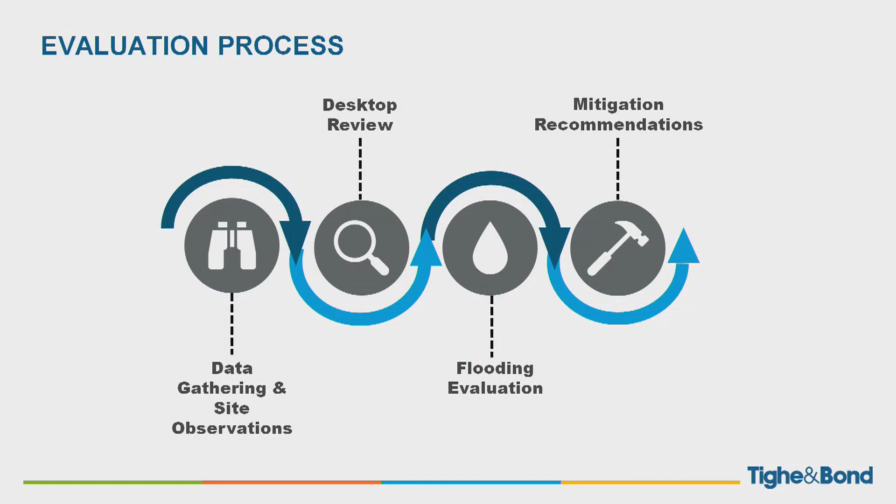So this map shows our study area, and if you're wondering what that shape is, it's based upon the area that contributes to the outlet of the entire drainage system, which is at the bottom of Seagate Road. That area is about 125 acres, shown in red. It consists of 239 structures and 7,400 feet plus or minus of mainline storm drainage pipe, so over a mile of storm drains in that area.

For reference, north is to the top. You can see Boston Post Road at the bottom there, and it extends as far north as Pleasant Street. You can see Gardner Street on the west or left side there. And at the lower right corner of the watershed, you'll see that's the Noroton Presbyterian Church, just for reference.

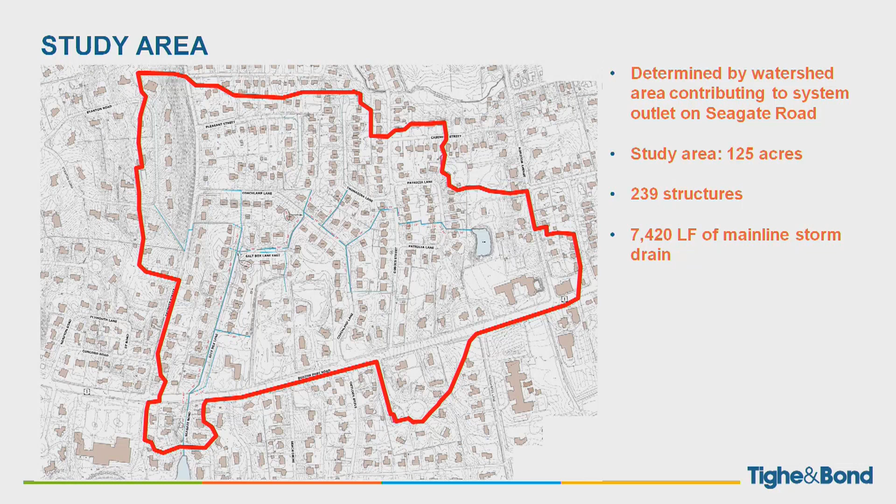So data gathering, it's like collecting puzzle pieces, right? There are different things that we look at. Some of them include the storm sewer maps. Also, we look at the flood insurance study maps that FEMA puts out, as well as high water marks. A lot of the neighbors had submitted to the town photographs that show flooding on certain dates, and that information is very useful for us when it comes to calibrating the model.

We also have rain gauge data. In order to correlate those high water marks to a rainfall event, we look at rainfall data to see how much rain had fallen on a particular date. We also look at the underlying soils, because if you can imagine, sandy soils drain much better than tight clay soils. So there are soil surveys that we use for that.

There's also flooding photos, as I previously discussed. Our field observations — just going out in the field, you can see sometimes high water marks on structures or walls or things like that. You could also see which catch basins appear to be undersized. We also look at tidal gauge data. A lot of times you don't need to look at this, but because this storm drainage system discharges to Holly Pond, we need to take a look at that. And then there's also the historic mapping, to see how the area has evolved and changed over time, and that sometimes lends clues as to what is causing some of the current drainage issues that you face.

So I'm going to start by discussing some of the flooding observations that have been made and how they relate to high water marks.

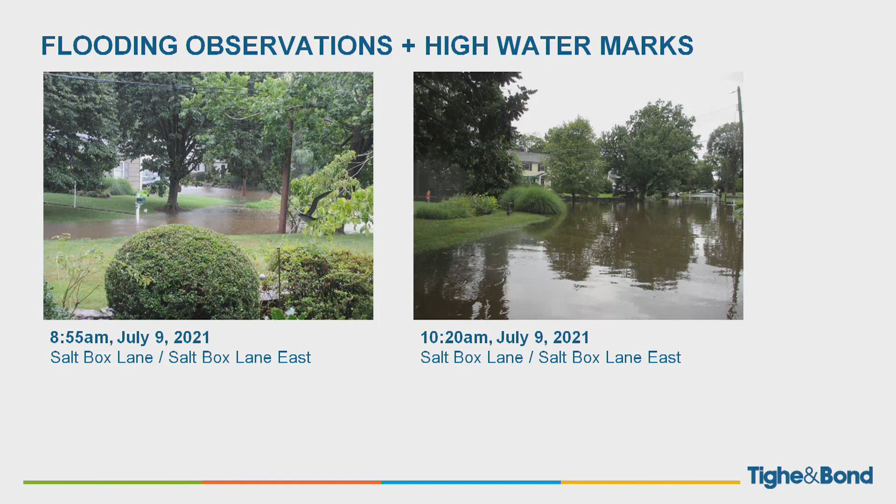Rain gauge data. There are various rain gauges around town, some part of a private weather network, and also here at Town Hall there's a gauge. We looked at the different gauges in the area and discarded the outliers. Sometimes a gauge is placed improperly or has a reading that doesn't make sense, so we apply a statistical analysis to discard the outlying data.

Then what we did was compare the measured precipitation and duration of the storm - how much rain fell and over how long a period - and compare it to NOAA Atlas 14, which is a guideline the National Weather Service puts out that ties specific rainfall duration with depth and a recurrence probability for areas throughout the country. We'll talk a little more about that.

So for a 24-hour duration storm in Darien, a 50-year storm will deliver 7.4 inches of rainfall. Keep in mind that's over 24 hours, and a 50-year storm doesn't mean you have the storm once and you're good for another 50 years. This is more of a probabilistic terminology that they apply.

For example, FEMA has been moving towards a percentage chance. A 50-year storm has a 2% chance of occurring in any given year. A 100-year storm is 8.32 inches of rain in a 24-hour period, so that has a 1% chance of occurring in any given year. For a 200-year storm, that's 9.4 inches in a 24-hour period, which has a 0.5% chance of occurring in any given year.

So our first significant storm event we'll discuss is related to Hurricane Elsa that happened in July 2021. You can see the different rainfall totals around the study area, and most of them were right around, on average, about 5 inches. There was one that was really low, and one that was significantly higher than the others, so we discarded those for the purposes of the analysis.

But that basically equated to a 50-year storm event because it dropped 5 inches of rainfall in a 6-hour period. If you look at the 50-year, for a 24-hour period, it's 7.4 inches. But by the time you translate that 24-hour to a 6-hour, it's a 50-year equivalent for that 5 inches of rain, which has a 2% annual chance of occurrence.

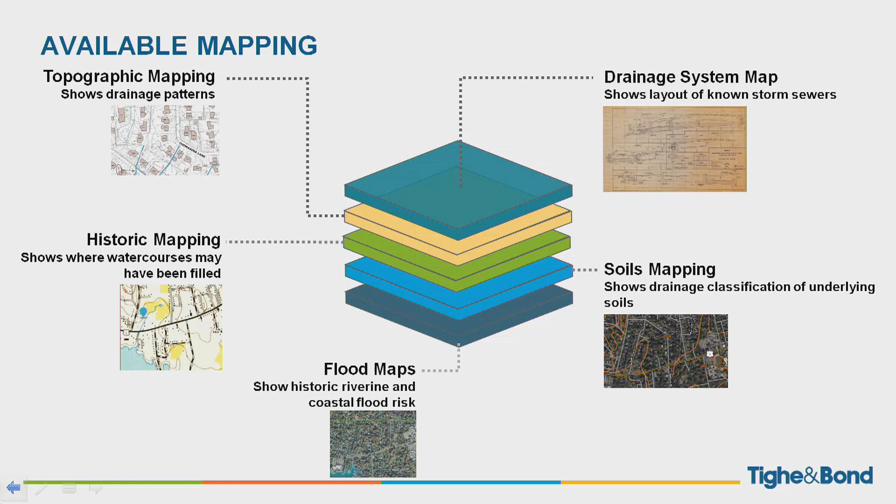One of the things that's important to realize about the flood insurance maps is that they represent historic risk. They don't represent current risk, and they don't take into account future risk. So that's something very important to keep in mind if you do look at these maps and interpret them.

The other thing is the flood insurance rate maps from FEMA only show flood hazards associated with coastal or riverine flooding sources, not necessarily urban or storm drainage flooding. So what this flood map shows is that there is a flood hazard associated with some of the area near Holly Pond, but in the study area there are no special flood hazard areas. Most of you know that that area floods, right? But it's not necessarily represented on the FIRM.

In fact, 30% of all flood insurance claims are filed in low-risk areas that aren't in a mapped flood zone. So just something to keep in mind.

We also look at topographic mapping prepared by the USGS, United States Geological Survey, and we look at the area over time, how it has changed. Believe it or not, they have maps going back to 1892 for the area. That marker shows the intersection of Saltbox Lane and Saltbox Lane East, and you can see the Post Road cutting left to right across the map. What's interesting is you can see a watercourse, that thin blue line, that snakes its way down into Holly Pond.

When you look at the map prepared in 1943, you can see that pond and the watercourse are still there, but you can see some development, more houses, more streets, so obviously some development happened. But then when you go to the 1951 map, the watercourse disappears. What we find a lot of times in doing these studies is that in areas where watercourses or wetlands have been filled, some of the drainage issues persist.

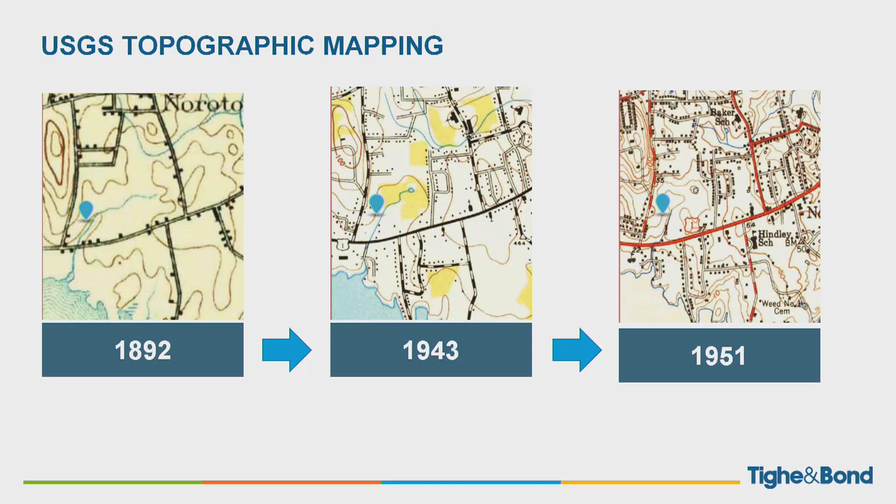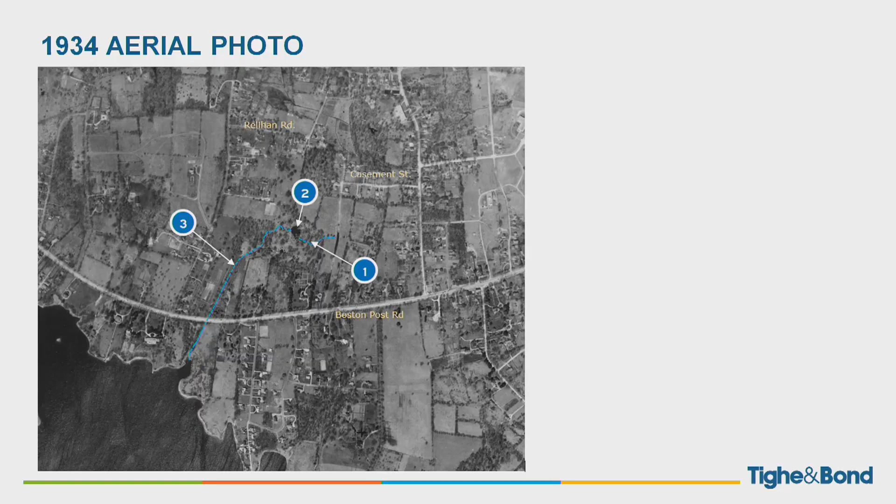Another resource we look at are aerial photos. This particular photo is from 1934, from the State of Connecticut Library. Some of the features I wanted to point out are the watercourse from Casement Street, labeled as 1. At number 2, you can see that small pond we saw on the USGS maps in the previous slide. The third one is that watercourse that goes down to Holly Pond.

You can see that in the dotted blue. It crosses the Post Road and then discharges to Holly Pond. Now, fast forward to 1965, you see quite a few things have changed. Obviously there's more development, and you no longer see that watercourse. All you see is a small remnant of a watercourse that runs behind the houses on Saltbox Lane and Saltbox Lane East.

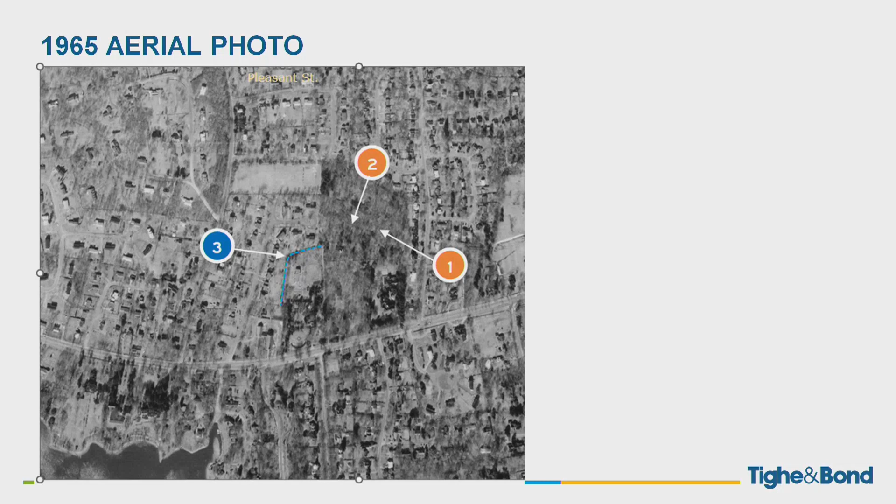So we supplement the mapping we get, the online resources, the photography, the USGS maps, with field observations. Now this is not to be confused with a detailed field survey, which would be the next step in the design. But this is just to confirm certain things for the concept study that we put together for our evaluation. It's also intended to fill in some of the data gaps we identified in our initial desktop review.

For example, structures that appear to be missing from the mapping, we send somebody out to take a look. Sometimes we'll open a few structures just to confirm connections and pipe sizes. Then in certain areas, we'll need to know the slope between two pipe segments, between two structures. We'll send somebody out to measure down to obtain the depth of the pipe. That way we can calculate what the slope between the two structures is.

So the existing town drainage system, don't worry, I'll go through this in more detail. But first, what you see just came up on the screen in green, those are 12-inch pipes. And typically in storm drainage design, you want your pipe diameters to increase as you work your way downstream. So keep that in mind as I go through this. In blue, we have 15-inch pipes, and then the next dark blue are 18-inch.

Then you got a little segment of 24 there. And then we have a segment of 30-inch pipes. And then we have some 36-inch pipes. And then we also have two sections of channel, right? We have a section of channel behind Saltbox Lane and Saltbox Lane East. And there's another section of channel that is on the west side of Seagate.

One thing I do want to mention is that we did not do a detailed study of the pipes in Post Road. Those are state maintained, whereas the pipes that you see here on the screen are town maintained. We did account for the flow coming from Post Road into the drainage system, but we didn't do a hydraulic analysis of the pipes themselves.

So one of the things that's pretty clear here is that you have some larger diameter pipes that go into small diameter pipes. So we'll actually go through these, and just looking at this, we did find some areas that we thought warranted further observation, or that we thought were of note.

So the first one occurs in the northwest area of our drainage system. What you see here on the right are the topographic lines, right? The closer they are, the steeper the topography. We're looking at Gardner Road, and at the top there is Pleasant Street. There is an enormous elevation difference between Stanton Road and Gardner Road.

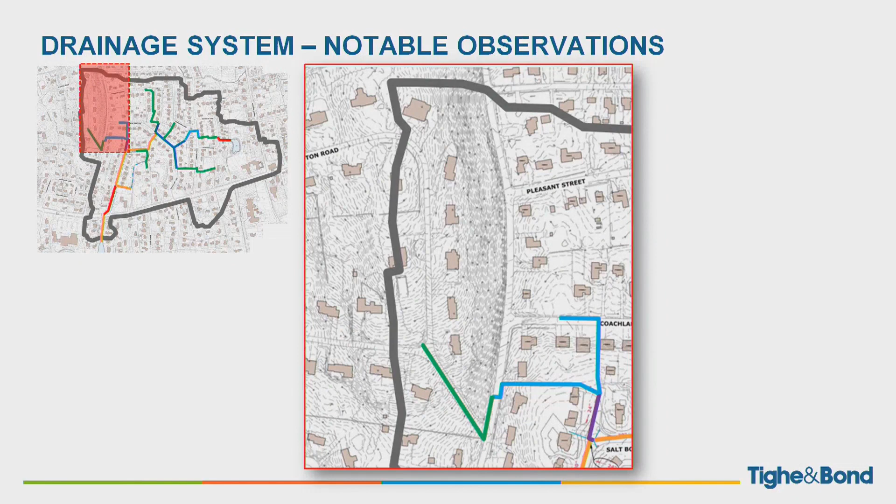One of the things that makes that of note is that steep slopes speed up runoff. Right? It makes sense. The water coming down the hill comes down a lot faster, has a lot more energy as it flies down the hill. And that momentum can cause the runoff to bypass catch basins. So instead of going into a catch basin as it would on flatter terrain, sometimes it jumps the catch basin, goes down to the next one, or even jumps the curb if it has enough momentum. So that's something to keep in mind.

The other area that we highlighted is down at the outlet at Seagate. You can see Holly Pond, that little blue finger that sticks up. We have a 36-inch pipe that comes down Saltbox at the top, and then transitions to an elliptical 29 by 45, which is essentially a 30-inch pipe equivalent. And then it hits a junction chamber at the intersection of Post Road and Seagate Road.

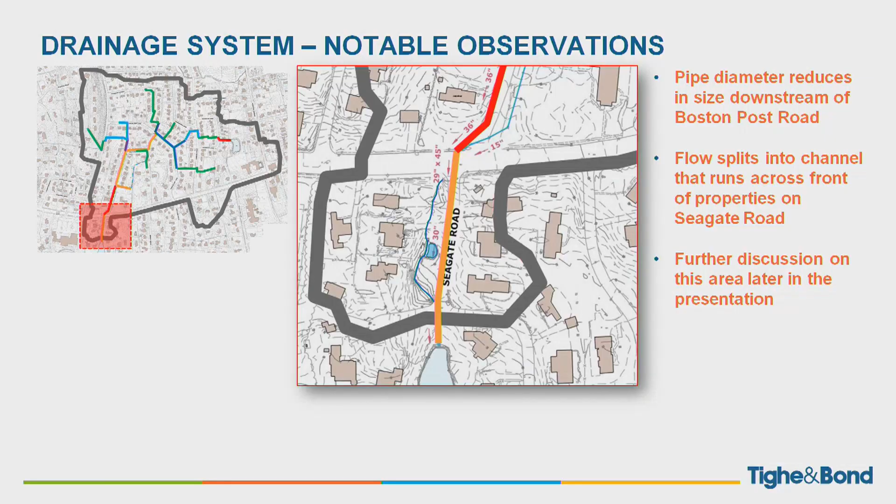And then it flows into the channel under low flow, or under high level flow continues straight down Seagate Road, which is kind of an unusual arrangement. You typically don't see that. It appears that the purpose of this whole arrangement was to keep that existing channel hydrated. We'll talk a lot more about that later in the presentation.

Another area that we looked at was the intersection of Saltbox Lane and Saltbox Lane East itself. There are a couple things going on here. What you can see in purple is a very short segment of 24-inch pipe that links together two 30-inch segments of pipe.

There's also a portion of the Saltbox Lane East drainage system that discharges into the swale, you see that in the green. Now, because the pipes in Saltbox Lane are under capacity, what happens is as the water starts to build up at that intersection, it starts to flow towards the east and into that drainage system in green and then into the channel. So it backflows into there, and that causes issues in that area.

And then another area that we looked at was an area between Saltbox Lane East and Coachlamp Lane. It's a low area, and it's probably where that pond had been. Low areas tend to collect runoff, but they can also overflow, right? They reach a bowl, it reaches a certain capacity, then it starts to overflow.

Another area that we looked at in more detail, the last one that we thought was notable and worth mentioning, is the detention pond behind the Presbyterian Church. There it's a 36-inch pipe that goes to a 12. That's obviously an unusual arrangement, but through our analysis we documented that it's not increasing peak flow. It actually controls flow pretty well there.

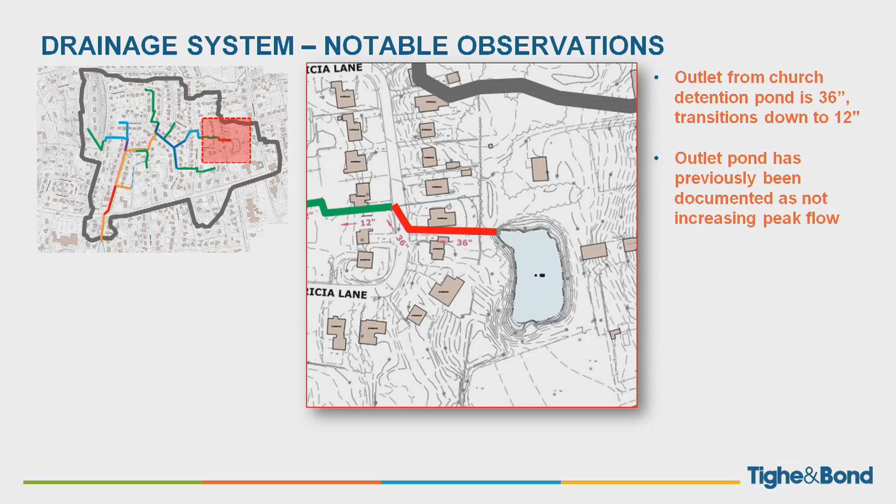So now we have all this information, we have to start putting it together and building a hydraulic model. These are basically the steps that we do. The first is gathering the data. We delineate the watersheds, we break that whole big study area up into smaller pieces so we can isolate certain areas in our analysis.

We build the model, then we calibrate the model, to make sure it represents observed conditions, so we can correlate it to a specific rainfall event and approximate the extent of flooding as a result of that event.

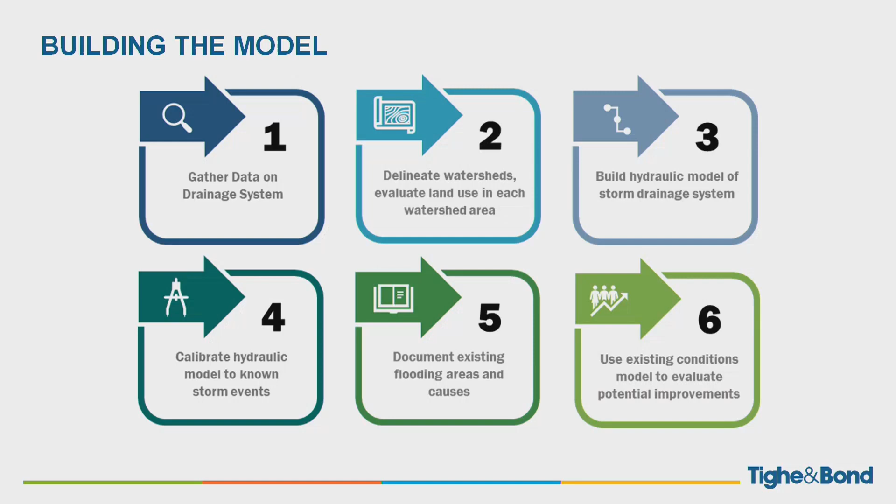We document the flooding areas and causes, identify areas that flood on a map, and then use that existing conditions model as the basis to model improvements. What would reduce the extent of flooding?

Each of these, what we look at is trying to isolate certain areas of the drainage system, and it helps refine the analysis. You get a better feel for what's happening in the specific branches that make up the system.

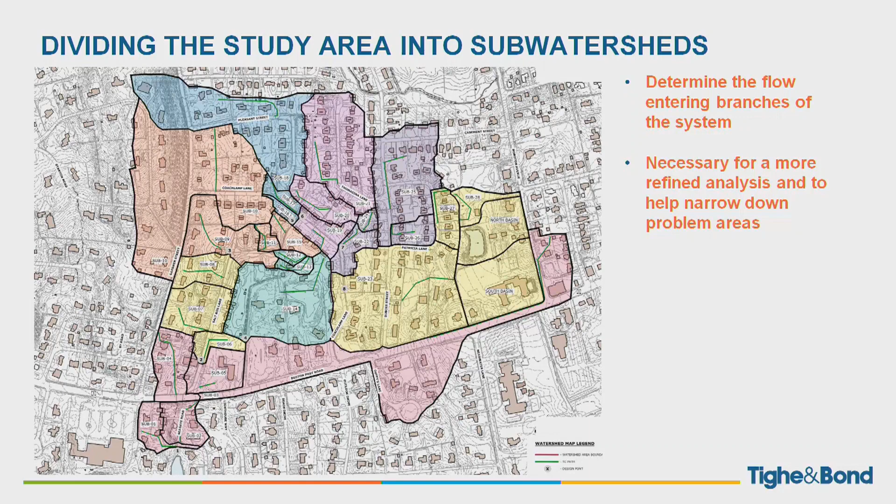In each of these areas, we calculate what the impervious area is. In the graphic at the left, under natural, undeveloped conditions, rain comes down, most of it goes into the ground, some of it you lose through evapotranspiration, and you get about 10% of that rainfall that runs off across undeveloped land.

But when you start paving things and developing them, you're cutting off the ability for the ground to absorb the rainfall. As a result, you get much more runoff. So whereas you had 10% in an undeveloped condition, you have 55% or more if it's paved.

So we calculated the impervious area in each of those subwatersheds. We also looked at the land cover, which goes hand in hand with the impervious cover. We look at what's lawn, what's house, what is forested, because they all have different hydrologic characteristics.

As I said many times, we also look at the underlying soil type. Is it sandy? Is it clay? Is it somewhere in between?

And then we also look at something called the time of concentration, which basically tells us how quickly the runoff in each of those watersheds discharges into the storm drainage system. That's dependent on slope, the flatter it is, the slower it moves.

It also depends on what type of terrain it runs over. If it runs over pavement, it's going to move a lot faster than if it was moving over grass or through the forest.

When I say hydraulic model, I want to clarify that it's not something physical that we build. It's a computerized model. In our case, we used Autodesk Storm and Sanitary. It was a good fit for this study because it allows us to have a large number of nodes or junctions for manholes, and it also allows us to consider the impacts of flooding over catch basins.

So when we have the model, we put all the information in, we run it and we get results. But we have to make sure these results make sense, so what we do is go through the calibration process.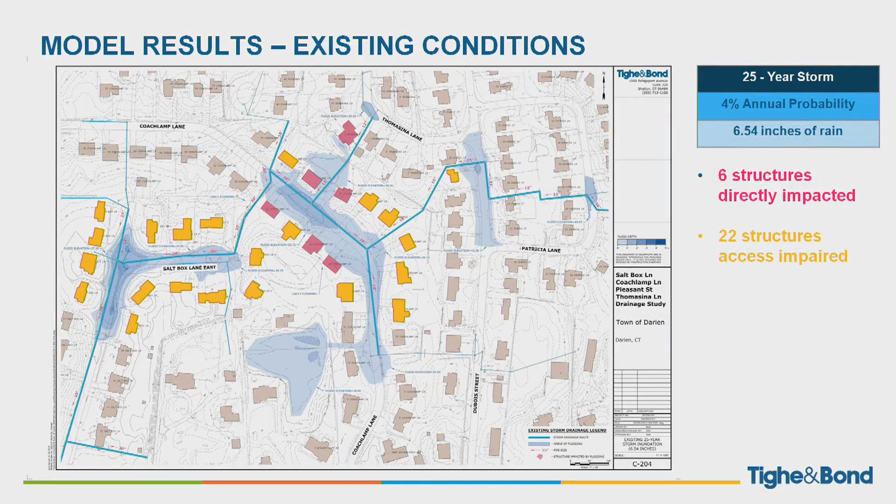Because now what you see are the properties in that deep red color - those structures are directly impacted, the floodwaters are up against the house. And the yellow mustard colored houses are access impaired because of the depth of water in the roadway. You can see there are 6 structures directly impacted and 22 that are access impaired. The 25-year is a typical town design standard for most storm drainage systems - we'll get into that in a minute or so.

And then we also looked at the 50-year storm - this is Hurricane Elsa, the one in July 2021. It has a 2% annual chance of occurring in any given year, producing 7.4 inches of rain in a 24-hour period. You can see the flood areas continue to expand because of the larger storm, as well as the impacts. Now we have 12 structures that are directly impacted by the floodwaters, and 31 that are access impaired.

The last storm we looked at was the 100-year storm event, which has a 1% chance of occurring in any given year. As you can see, there are very significant impacts. 29 structures are directly impacted, and 41 structures are access impaired.

One thing to note is if you look up at Thomasina Lane, off the top of the sheet, there are another 16 houses. Because Thomasina Lane is a cul-de-sac, and there's over a foot of water in the roadway that takes up the whole roadway, you're not going to be able to get out or in. So there are some very significant impacts.

Some key takeaways from our analysis of the existing drainage system: it only handles a 2-year event, while the Town of Darien design standard is 25-year, with a 50-year design for low points in the system. There are multiple choke points, and we talked about inconsistent pipe sizes.

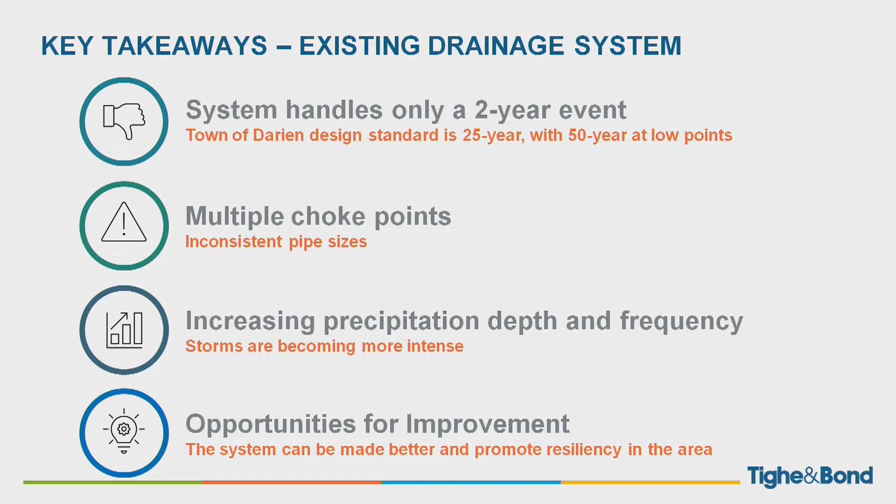There's also a lot of talk about climate change, and climate data shows that precipitation depths are increasing - our storms are getting more intense. Based on current rainfall data, you could expect it on the current trajectory to get worse in the future. But based on our analysis, there are also opportunities for improvement, and we'll discuss how we can improve storm resiliency in the area.

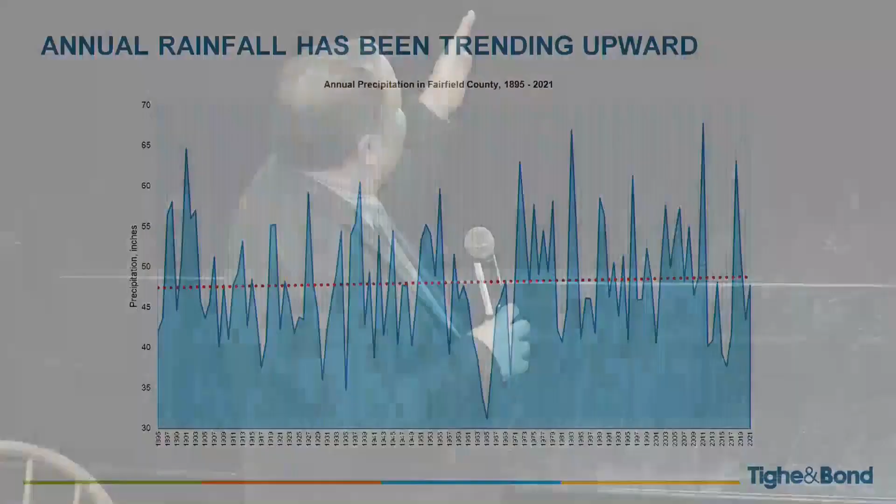So first, a little bit about what we're seeing in terms of rainfall trends. Annual rainfall has been trending upward. We can see records here, I believe out of Bridgeport, that extend from 1895 to 2021, and you can see in general the trend has been increasing. It doesn't appear to be overly dramatic, but there is definitely an upward trend in the rainfall, on an annual basis in terms of inches.

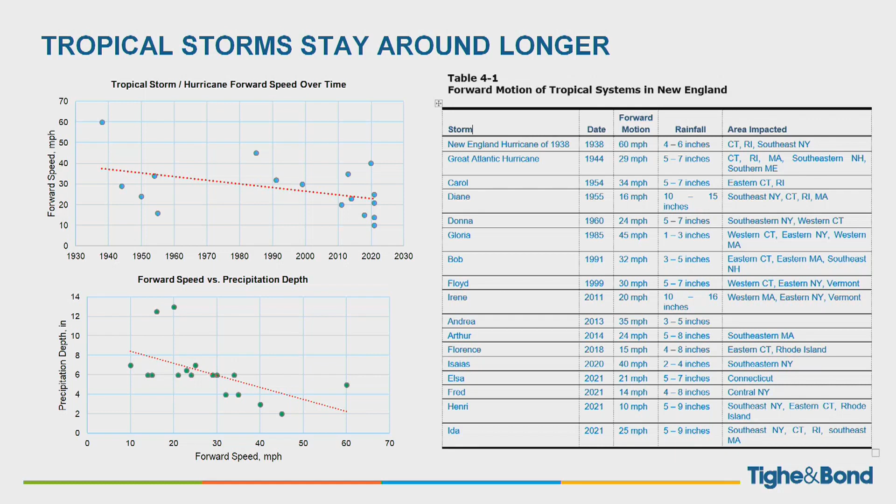One reason for that is tropical activity. What the National Weather Service has found is that tropical storms tend to stay around longer - they move slower. You can see on the upper left, the hurricane forward speed in the northeast over time has slowly declined. As these storms move more slowly, they spend more time in the area, and as a result they tend to drop more precipitation. You see that in the lower left graph, where slower forward speeds, as you move to the left, show precipitation depth also increases.

On the right is a table. I'm not going to read everything in it, but just to give you a flavor of how the forward motion of storms has changed over time. If you think about what happened in Texas with Hurricane Harvey back in 2017, the reason that storm was able to drop so much rainfall was because it just sat there - it didn't move.

The National Climate Report that the National Weather Service put together a couple years ago shows that New England is trending wetter. There are a couple different factors that influence it - they look at emissions - but the general trend is that rainfall and intensity will be increasing going forward.

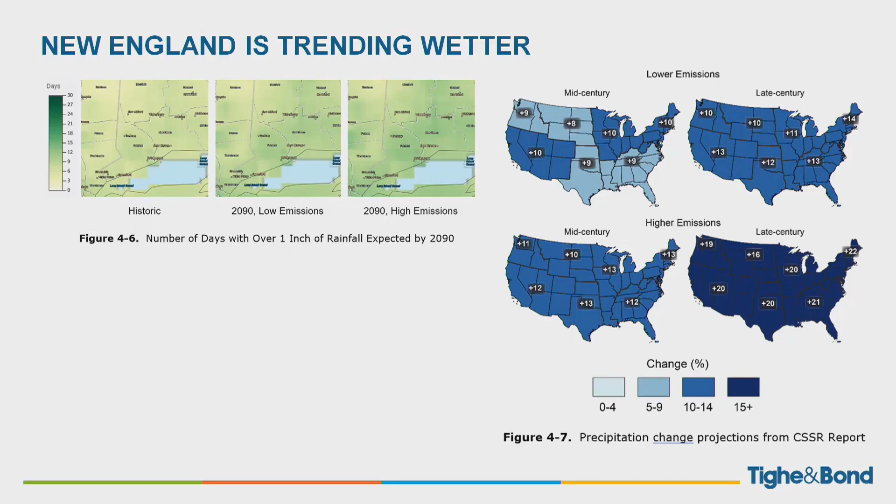At my level as an engineer, we base our designs on criteria published by the National Weather Service, and that criteria has changed. When I first started in 1994, we used Technical Paper Number 40, which was developed in 1961, and we probably used that through the mid-2000s, as newer rainfall information started coming out.

Back then, for a 24-hour storm duration, the 50-year event was 6.5 inches, and the 100-year was a little bit more than 7 inches. New guidance issued by NOAA, called Atlas 14, came out in 2015 for this area of the country, and you can see for this storm duration, the 50-year has increased by nearly an inch, and the 100-year has increased by over an inch. So the old 100-year criteria is essentially the new 50-year criteria - that shows how things have changed and evolved in terms of designing for rainfall events.

So with all that in mind, we made a couple of recommendations. We took the model, the existing conditions model.

We were satisfied that it relatively accurately captured the areas of flooding. It made sense based on the rainfall events. So then we started developing some recommendations based on that, looking at areas of what could be improved.

Before we go any further, I'm going to talk a lot about pipes and box culverts, so I thought it would be a good opportunity to explain the difference between the two and give you a visual, because sometimes as engineers we get too excited and too technical. Reinforced concrete pipe is standard - it's a round pipe, readily available, easier to install, and has a relatively low installation cost compared to a box culvert. A box culvert is a lot bigger - you need more equipment to set it, more labor, and it has a longer lead time, but it provides more capacity than a traditional round pipe. Keep that in mind as I go through the different options.

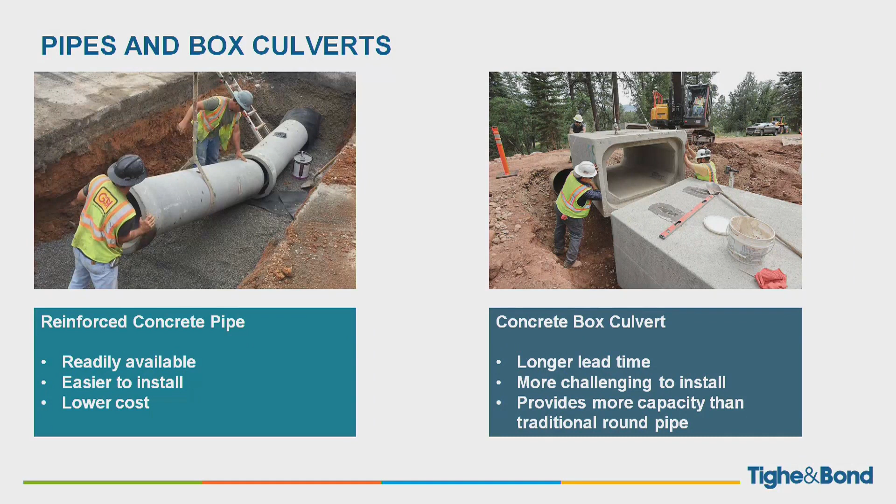The first one is alternate 1A, and we designed this for a 50-year storm throughout - that's 7.4 inches of rain. Any pipe highlighted here in the heavier line gets replaced, basically 90% of the pipes in the network. These are the main lines - there are also catch basin laterals that connect to these, which will likely also be replaced. If you remember, the line coming down Salt Box was 36 inch, then transitioned to a 30 once it got to Seagate because of that diversion. What we're proposing as the spine of the system is a 3x5 box culvert - 3 feet high and 5 feet wide on the inside - versus what's there now, only a 3-foot round pipe. So that's a significant change.

The other thing we did for the purposes of this alternative analysis was assume that we would direct everything to Holly Pond - that diversion to the watercourse on Seagate is not being used in this analysis, so we bypass that whole watercourse system. Some other changes - the pipes in Salt Box Lane East changed from about a 30 to a 48, so basically bigger pipes everywhere. The heavy dashed navy blue lines on this map are the areas that flooded in the 50-year storm under current conditions. With these improvements, there is no flooding in any of the local roadways - that would be a significant improvement.

Another alternate we looked at was designing for the typical town standard, the 25-year design storm. The pipes are smaller, and we only have one small segment of box culvert to help us get across the Post Road, connecting two 48-inch pipes that are roughly hydraulically equivalent. The reason we want it shorter going across the Post Road is to avoid utilities - underground electric, sanitary sewer, a whole host of utilities. Going shorter but wider gives us a better chance of avoiding those utility conflicts. The dashed navy blue line shows the areas that flood in the 25-year storm - this addresses a 25-year storm with no flooding in the streets.

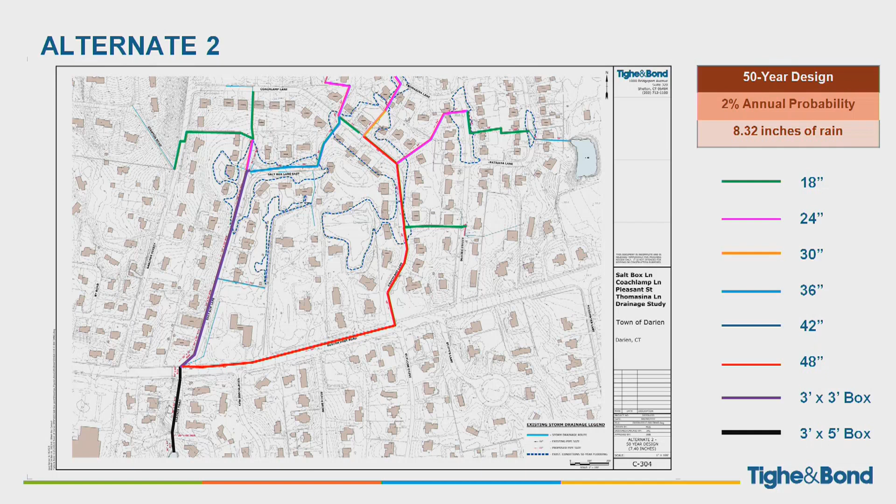Then during some of our meetings, Ed had challenged us. He said, we have this 50-year design, right? So what if we implemented this 50-year design? What would happen in a 100-year storm event? And that's what this drawing shows here.

So this is our alternate 1A with a 3x5 box culvert that forms a spine of the system. And you'll see areas of pink or purple. You can see one at Salt Box Lane and Salt Box Lane East, and you can see one up at Coachlamp. Those are areas with the 50-year design that would flood during a 100-year storm event.

So it is about 18 inches in both of those locations, so there are going to be some access impairments. But when you compare it to the area that floods currently in the 100-year, which is again that navy blue line that's dashed, you can see the flood extents are reduced significantly. We'll get into a little bit more on that later.

We also looked at the alternate 1B, which is a 25-year design. We ran the 50-year storm through that system, and you can see, although there is a reduction in flooding, the heavy blue is the 50-year storm. It does reduce the extent of 50-year flooding, but there's still a significant amount, particularly at the Salt Box Lane and Salt Box Lane East intersection.

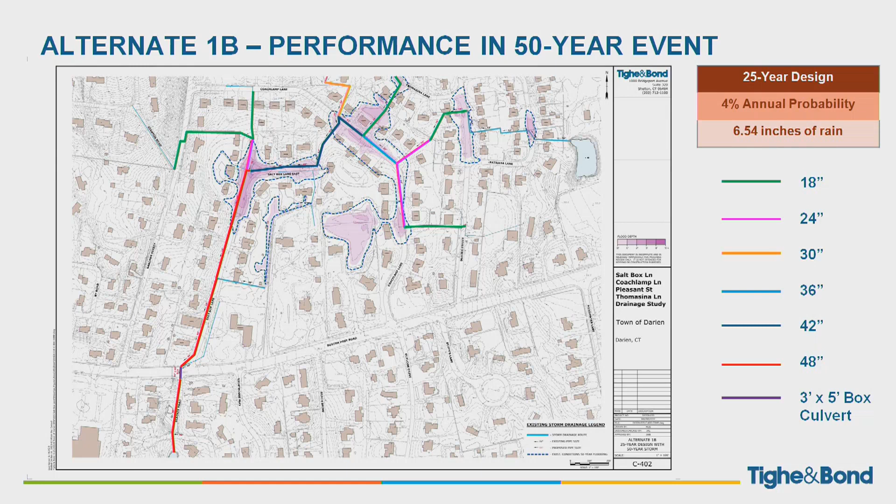Alternate 1C, that's the 100-year design. Obviously, since it's the 100-year design, the 50-year would work.

And then alternate 2, we did not evaluate that. One of the reasons I want to discuss is why we really didn't explore alternate 2 too much further was because of the cost, and also because of the amount of time that we spent in permitting trying to get this approved, because it would be going down the post road. DOT has a lengthy permit process if you're replacing lines in their roadway, not just a crossing, but actually along the length of the roadway. And also the utility conflicts - we'll be hitting utilities all the way down the length of that. So we decided not to pursue that much further.

We also looked at the reduction in the flooded area for the 100-year storm compared to existing conditions. Alternate 1A, it was a 94% reduction - that's pretty good. Alternate 1B, we didn't evaluate that, because it's only a 25-year design. And alternate 1C, that is a 100-year design, so that would be 100%.

And then we looked at the number of houses that were impacted either directly or indirectly by access. So direct impacts, right now it's 12. With all four of the alternatives, it would drop to 0. We don't anticipate any house flooding as a result of backup from the storm sewer. The number of houses that are access impaired under existing conditions for a 50-year storm event, it's 31. Alternate 1A, that's 0. For alternate 1B, which is a 25-year design, there's 13 houses that are access impaired.

So with all that in mind, our recommendation to the town is alternate 1A, which is a 50-year design.

These are some of the reasons why we recommended this particular alternative. It meets or exceeds the town design standard, providing a factor of safety for the future. It's a significant improvement in roadway flood depth over the 25-year and 50-year events, so roadways are kept clear for storms up to and including the 50-year event.

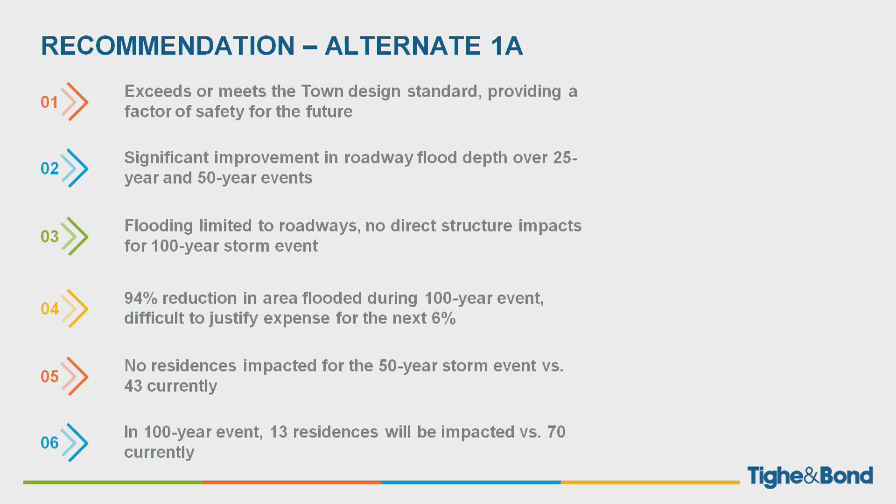In a 100-year storm, flooding is limited to the roadways themselves, with no direct structure impacts. That's a 94% reduction in flooded area for the 100-year event. It's difficult to justify spending another 600 to 700 thousand dollars for that next 6%.

No residences are impacted for the 50-year storm event, whereas under existing conditions there are 43 impacted either by access or direct impacts from floodwaters reaching the homes. In the 100-year event, under Alternate 1A, 13 residences will be impacted, and this is access only, whereas 70 are impacted in total under existing conditions.

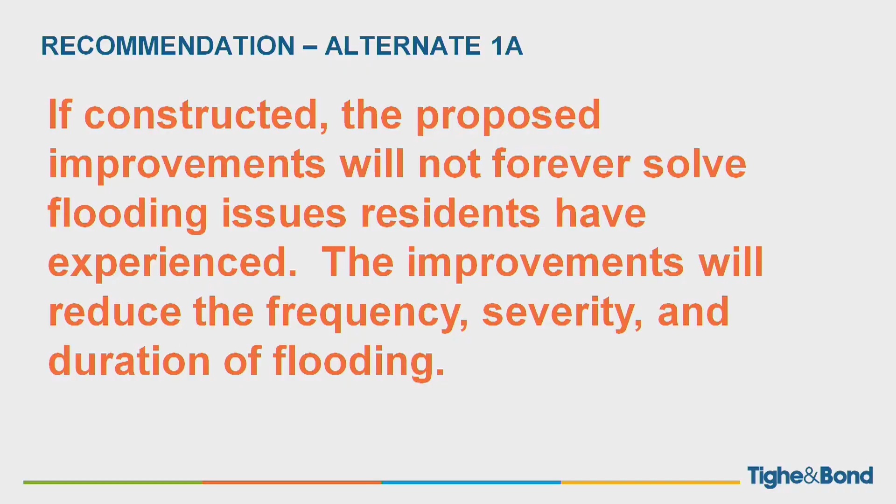One thing I want to point out is there's always a chance for a bigger, heavier storm than the 50 or the 100, as we saw with Hurricane Ida. So if constructed, the proposed improvements won't forever solve the flooding issues the neighborhood is seeing. There could potentially be a storm event that exceeds the capacity of the system. But the improvements will reduce the frequency, severity, and duration of flooding, so if and when it does back up, those floodwaters will recede a lot more quickly because there's a lot more capacity in the proposed system.

So some other improvements — I spoke a lot about pipes, increasing pipe sizes, but along with that comes some other improvements that also need to happen. The outfall, where the whole system discharges to Holly Pond — that outfall head wall needs to be replaced to accommodate the larger 3x5 box culvert.

Catch basins, the drainage inlets on the side of the road — a lot of those will need to be replaced. They'll have sumps that improve the ability of those structures to capture debris, like leaves and things like that. The sump is a space that lies beneath the pipe in the catch basin, so that'll improve conditions as well.

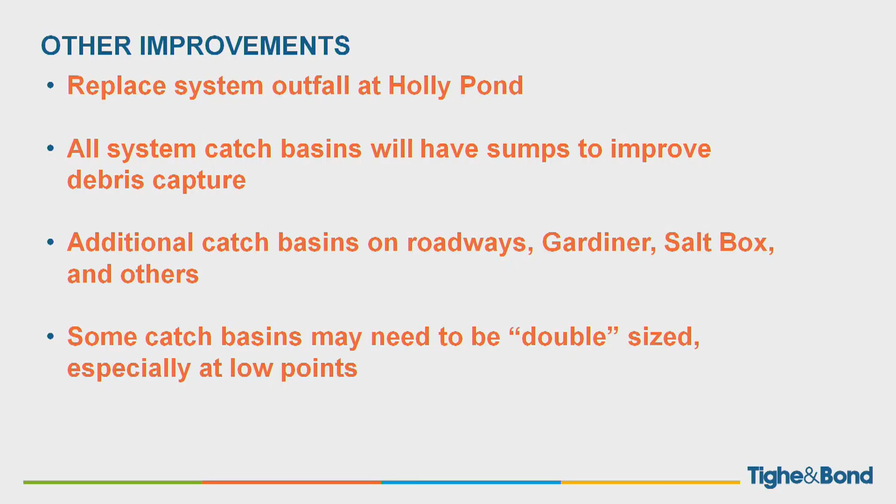Also, one of the things we noticed out there is that in some areas there's a significant distance between inlets on the road. So what we'll do is add additional catch basins to improve the interception capacity of the runoff, especially on Gardiner and Salt Box. Some catch basins may need to be double-sized.

I don't know how many of you have been out to the Abbey Intervale neighborhood. The town did a drainage improvement there probably about 7 or 8 years ago, and a lot of the catch basins were increased in size from a single frame to double to improve interception capacity, which usually happens at low points. So that's something else we'll be looking at here.

So one question you might have is, why not go even bigger? Why not get the biggest pipe that you can fit in there? There are a couple reasons why you wouldn't want to do this, including expense. But a pipe needs a minimum amount of soil above it to support traffic loads, so you can't really raise a pipe anymore — you'll have to go down. And the deeper you go, the more expensive and labor-intensive it becomes.

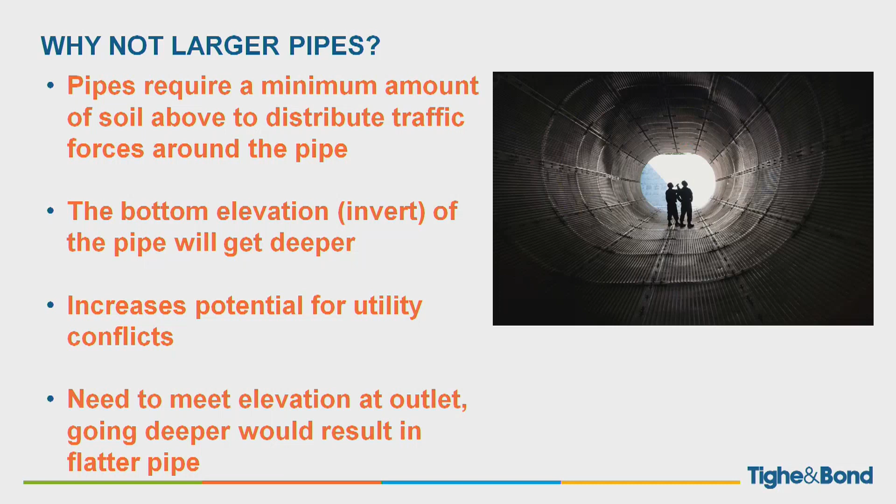But as your pipe gets deeper, your pipes also get flatter, and that reduces your hydraulic capacity. By the time you get to the bottom of the system, at the outlet at Holly Pond, you might be too low — permanently below the normal water surface of Holly Pond. It also increases the potential for utility conflicts, and I have a slide that better illustrates that.

So what you see here is basically a cross-section view across the street. You've got two houses, you can see a car on the street, and right now the whole area is serviced by sanitary sewers. You've got the sanitary sewer in the middle of the road, and each house has a lateral connecting its internal plumbing to the sanitary sewer. In most cases, because the storm drainage pipes are relatively shallow — only about 2 feet below grade, below street level — that existing storm drainage pipe sits on top of the sanitary sewer laterals.

But if you go with a larger pipe, you can't go up because you already have that minimum cover, so you can only go down. What happens is you have a conflict: the bottom of your pipe runs into the sanitary sewer lateral. So now you're not only replacing the storm drainage pipe, you're also replacing the sanitary sewer laterals. In some cases, you may not even be able to make it across, so you'd have to come up with some kind of weird pumping system for this house on the left, or run dual sanitary sewers down the street. These are all things we look at, and that's why we generally try not to make the pipes much larger than what they are.

I'm sure a lot of you know about stormwater detention. If you have a pond, you can hold water on site and slowly release it over time. So why not use that low area between Coachlamp and Saltbox Lane East as storage?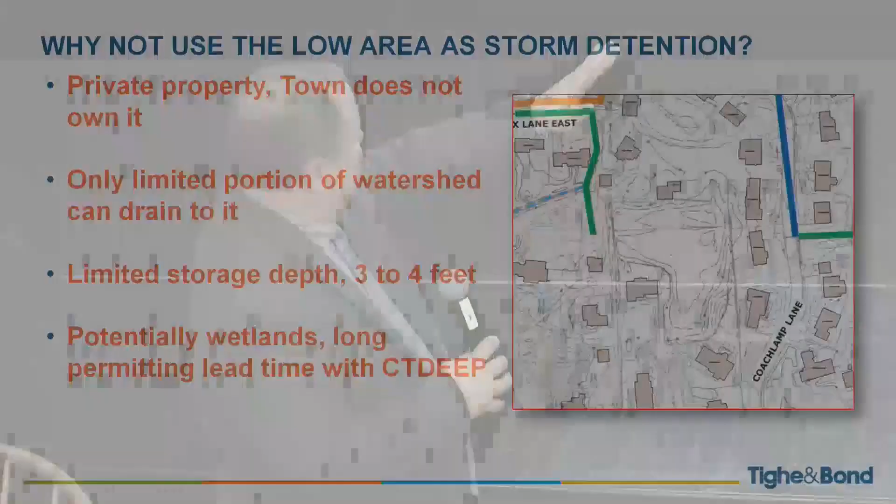Well, first of all, it's private property, the town doesn't own it, so that's one good reason not to use it. But also only a limited portion of the watershed can drain to this area. A lot of the runoff into the system comes from the north and from the west, which we wouldn't be able to pipe to this area. And at the end of the day, it has relatively limited storage, maybe 3 to 4 feet deep at most. The other thing is, I've run into this on a project in Bridgeport, is that there's a lot of permitting issues that come with this, especially if this is wetlands. Trying to use wetlands as detention is a very long permitting process with DEEP.

The other thing we looked at is what are the potential impacts on downstream properties. The system was designed to do no harm—we're not trying to increase flow going downstream. One of the big benefits of this project is that it's not creating additional impervious area. Early in the presentation, I said the more you pave things, the quicker the runoff is. Fortunately, this isn't a development project where we're paving a fresh, undeveloped lot. We're just replacing what's there in the roadway in kind, not creating new roads or anything like that, so there will be no increase in volume as a result.

The project discharges to Holly Pond, which is a large coastal water body connected to Long Island Sound, which is connected to the ocean, which certainly helps us in this case. The discharge velocities coming out of the pipe outlet will be less. Right now you can see the ponded water sits on top of the catch basin, exerting force on those pipes, so the pipe tends to run faster because it's running under pressure.

I had mentioned several times that there's a watercourse on Seagate Road, which basically splits the flow coming from the Saltbox Lane neighborhood. The lower right shows a video capture from one of the Seagate neighbors during the July 2021 storm event. So you can see that there's also flooding issues down there.

In the process of going through the town mapping, we found this sewer drawing from when sewers were extended to Seagate. I highlighted the existing storm drainage network in blue, and that irregular grayish-blue shape is the existing watercourse. You can see the blue arrows that just popped up—that's the runoff in the storm drains from Saltbox, coming down Saltbox and across the Post Road. In addition, there's also runoff, shown in the pale blue arrow, that comes from further east along the Post Road.

This one, north is to the left, right?

You can see that runoff in the pale blue arrow comes in towards Seagate as well. Then there's a splitter manhole right near the intersection of Seagate and Post Road. That manhole splits the flow into two directions: it either heads west towards the watercourse, the darker green, or further down Seagate with the lighter green. There's also additional runoff contributed by Post Road to the west of the intersection, that's the orange arrow. Two catch basins in Post Road discharge into that watercourse. Everything rejoins back together at the intersection of Seagate Lane where you can turn left or right.

So a little bit more about that manhole. We found some old construction drawings, and it's an octagonal shaped manhole. Here we're looking at the plan view, you can see the octagon on the upper left. We're 180 degrees from the previous drawing, so north is to the right here. That blue arrow shows the flow coming in from Saltbox Lane from the elliptical pipe, which is the 36-inch equivalent. The pale blue is what's coming in from Post Road.

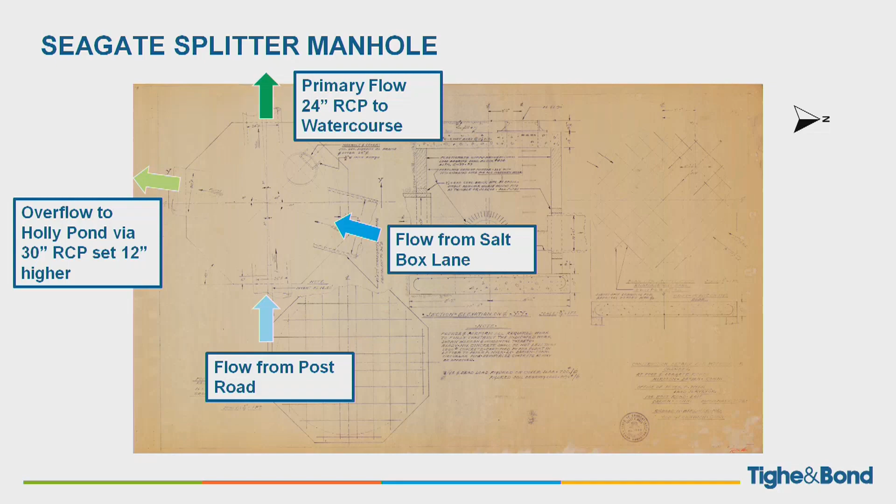What happens is it splits. First, the primary direction of flow when it starts to rain, that runoff enters the manhole and makes a right turn towards the watercourse out a 24-inch pipe. As the rainstorm continues to build, more runoff fills that pipe and enters the chamber. Eventually it builds up to about a foot, and when it gets a foot high in that chamber, it starts to flow down the 30-inch reinforced concrete pipe in Seagate towards the outlet. So at that point both pipes from the chamber are flowing, but the primary direction where it goes first is into the watercourse.

Some things to keep in mind: we're not increasing the amount of flow into the watercourse. Alternate 1A, as did all the other alternates, that dark green arrow to the north, we'd be shutting that off, so our analysis accounts for everything just going straight through. We're not contributing anything to the watercourse. Now there are some reasons why we might not want to do that - we want to make sure we maintain a certain flow for wetland reasons, so that's something we'll have to revisit during the detailed design phase.

Right now, with the design alternates, everything bypasses that watercourse. Runoff from Post Road west of the intersection, that pair of catch basins with the orange arrow, will remain in place - we won't be changing that because it's a state roadway. Like I said, these alternates are conceptual right now. The next phase will be to actually design these improvements, to put a set of plans out to bid, get approved, permitted, and then out to bid. So there's certainly a lot more design that needs to happen.

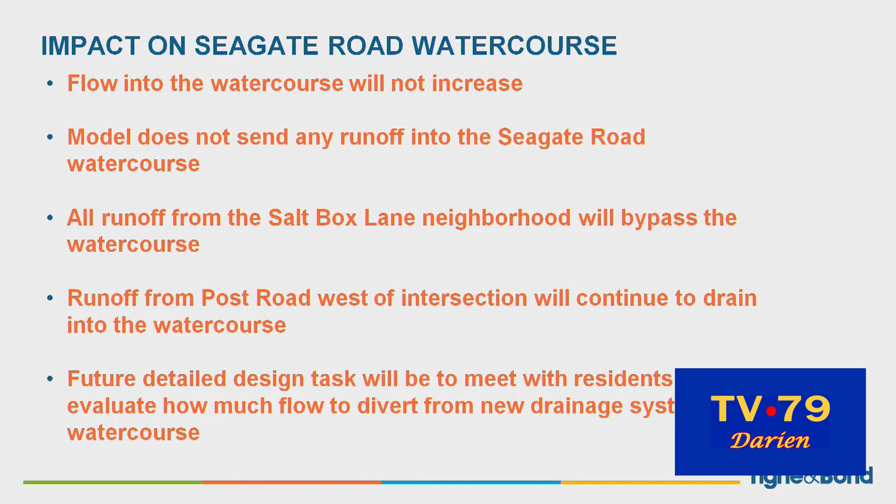One of our future tasks is to meet with the residents on Seagate and evaluate what's the right amount of flow to send into that watercourse. Do we open up that manhole - right now it's a 24-inch, maybe it becomes an 8-inch pipe? Or maybe we change the elevations in that manhole. So those are some things we'll have to take a look at to see what really makes sense, and also look at whatever amount we send through there, how that impacts things. There are a couple driveway crossings, there's a bridge there, and there's also a small spillway - those are all details we'll have to take a look at in the next phase.

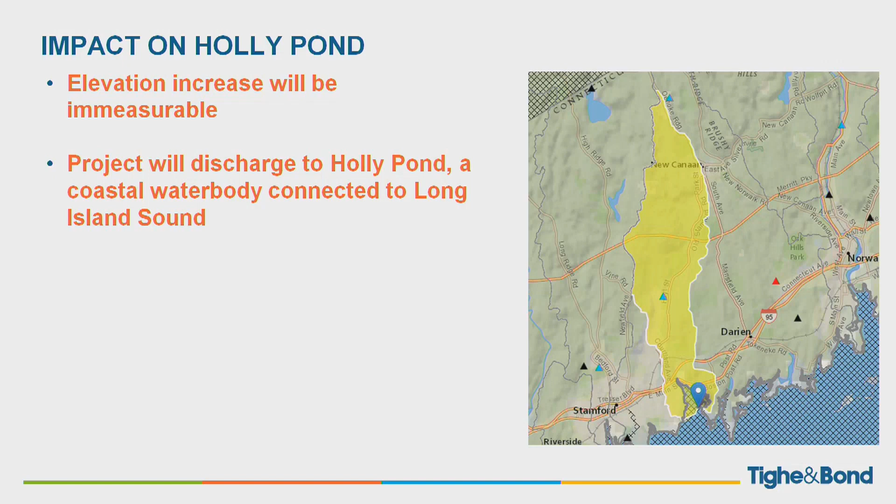In terms of impact on Holly Pond, the elevation increase will be immeasurable just because Holly Pond is so large compared to what contributes to it. Like I said, the project does discharge to Holly Pond, which is connected to Long Island Sound.

The salt box lane system, at the very beginning of the presentation, is 125 acres. But that's not the only thing that contributes to Holly Pond. You've got the Noroton River that contributes to Holly Pond as well. You can see the yellow highlight on the map to the right. A drop of rainfall anywhere in that yellow area that runs off will eventually find its way into Holly Pond, and that area is a little bit over 8,000 acres. So the salt box lane system is only 1.5% of the total area that contributes to Holly Pond.

There's also the tidal impacts, and of course there's a permitting element. There could be an extreme high tide. We did model it with a high tide in mind, but we didn't do an astronomical high tide or anything like that. So there could be situations where the system backs up, and there's really not a whole lot you can do - you're fighting the ocean.

Due to the outfall replacement, because we are replacing the outfall, we'll have to do work below the coastal jurisdiction line. That opens up some permitting requirements for the project from both the Army Corps and the Connecticut Department of Energy and Environmental Protection. The first thing we need to do, because we need to go to the Army Corps, is to also go to the State Historic Preservation Office and file a consultation with them. That usually doesn't take too long - hopefully you don't find anything.

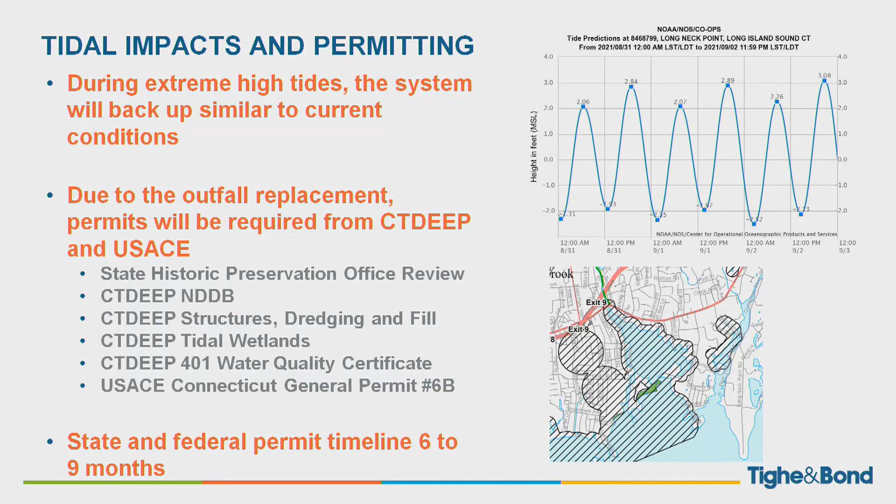But the other thing we have to take a look at, if you look at the lower right, this is from the Connecticut DEP Natural Diversity Database. What this shows is areas that have the potential to house endangered and/or threatened species, and you can see all of Holly Pond is an area of concern. So when we develop the plans in further detail, we will have to submit them to DEP for a consultation with the fisheries and their fisheries biologists.

Also, because of the work we're doing below the coastal jurisdiction line, we're replacing that head wall there, so we have to get a DEP structures dredging and fill permit. A DEP tidal wetlands permit likely. And we also have to get a DEP 401 water quality certificate because we're applying for an Army Corps Connecticut general permit. The Army Corps has a series of general permits that cover different activities - new outfalls in tidal areas is general permit number 6B.

So you can see there's quite a bit of state and federal permitting, and typically the process can take anywhere from 6 to 9 months. I would probably say I'd venture it would be more towards the 9-month end, based on what I'm seeing, especially on the Corps end.

So, all that said, what are our next steps? Once the town gives us the green light to proceed with design, the first step is to get a detailed topographic survey. We'll actually have a surveyor go out that'll measure all the structures out there, take readings to determine the elevations of those structures, not just the frames but also the pipes, recording the size and material of the pipes. We'll also take a look at some of the off-road things, such as the structures over that watercourse on Seagate. There's a 125-acre area to cover, so it's a very large survey area.

Once we're done with the permitting, we finalize the design, get it ready for bid, put it out on the street for a bid, and then negotiate with a responsive low bidder, and then get ready to construct. Construction, just because of the area and amount of work, is about 12 months. So, all said and done, from design through permitting to a contract award is about 21 months, plus another 12 months on top of that. Unfortunately, these things do take a while.

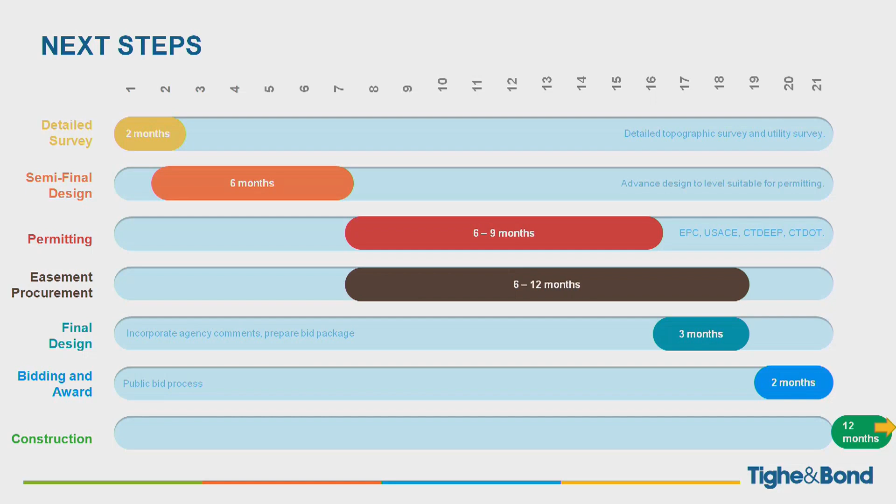When we do get to construction, expect about 12 months, excluding winter shutdown period. The way you construct drainage systems, you start at the bottom and work your way up. So work will start on Seagate first, cross the Post Road, work your way up Salt Box, and then branch out from there.

One of the requirements is that access to properties has to be maintained at all times. That's not to say you might need to wait 5 minutes for a contractor to move a piece of equipment out of the way, but they do have to provide reasonable access to your property at all times.

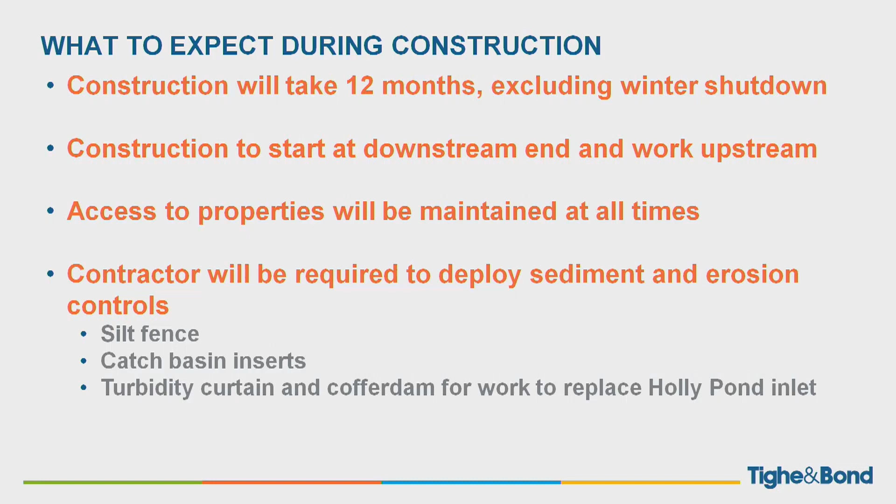The contractor will be required to deploy sediment and erosion controls. This is particularly important because, as a town project, you want to set a good example for all the private developers in town. There'll be a lot of eyes on this project, not only from the neighbors, but also from the town themselves. Some of those include silt fence, catch basin inserts, and turbidity curtains - basically floating booms - and possibly a cofferdam. Not sure what form that'll take, but you likely need a cofferdam to achieve the work down at Seagate to replace that head wall.

That wraps up my presentation, and at this point I'll open it up for questions. Ed, I don't know if you want to handle that part. Thank you.

Wow. I did say it was a little long, but very educational. I think Joe did a fantastic job. I went through these slides a couple times, so I want to thank him personally. We have done a lot of work on this, particularly because of what had happened and the work that's going to be needed here in these areas to help alleviate some flooding to a level where I'm comfortable saying that we have a good project, and I think we do.